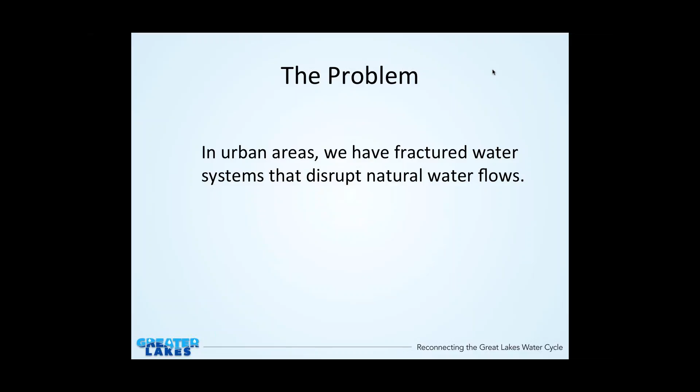The problem that we're addressing in this project is how we've fractured our water systems. We've disrupted the natural water flows. In the natural water system in general, when there's a rainfall or a snow melt, about 10% of that water flows off very quickly into the nearby streams, rivers, or lakes with natural ground cover. And about half goes into the ground, infiltrates to restore the groundwater supply, which is so important for our uses as well as for natural habitat, for wetlands, etc.

Unfortunately, as we've developed our municipalities, we've changed a lot of that natural surface into very impervious cover, about 30 to 50% in most urban areas. These are things like roads, roofs, parking lots, and even lawns that often are compacted. They're not totally impervious, but are less pervious than before. The result is that instead of 10% in the natural system, we get 30% runoff very quickly and immediately. And generally what we do in our municipalities is direct that into a pipe so that it's carried off quickly into nearby streams, rivers, or lakes.

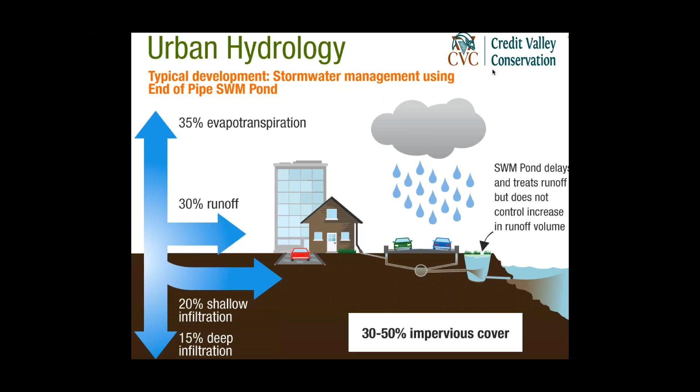So in this project, we're trying to find ways to reconnect the water cycle, and we are looking at water supply, wastewater, and stormwater as all part of one integrated cycle. You'll hear Becky talk later about the silos. We tend not to plan for the three of them jointly as part of the same system, even though they affect each other and the solutions work with each other.

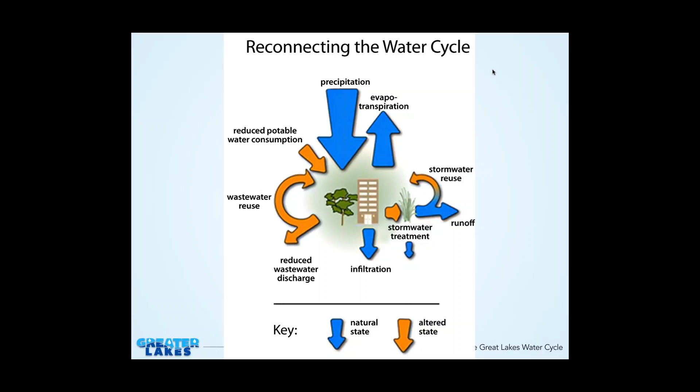Here's a chart which I won't go through in great detail, showing the potable water, that's our drinking water, wastewater, stormwater, and the parts that we're focusing on are in the mid-blue color, such as demand management, which is things like water efficiency, gray water, which is reuse of water, recycling, stormwater reuse, etc. So that's where we've really been focusing our work.

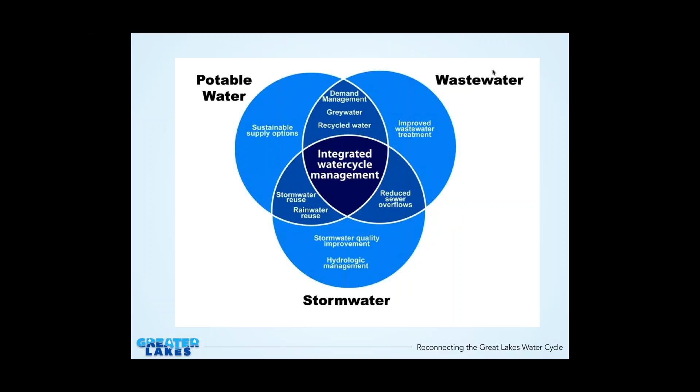I want to tell you a few of the main lessons we've learned that have become our guiding principles. The first is that we need to set up strong source water protection programs to protect the waters on a watershed basis for both natural and human purposes. We also need to engage in water efficiency and conservation programs to reduce the removal of water for human consumption from groundwater, lakes, or rivers. We need to set up wastewater reuse systems to further reduce water consumption.

So instead of just using water once and then throwing it away, we reuse that water by using it for outside watering, for example, or to deal with the flushing toilets as another example. We are using heavily treated water, drinking water quality water. We should only be using that for things that need that level of purity of water. And that means, for example, that we shouldn't be using potable water for most outdoor uses or for things like flushing toilets or washing clothes.

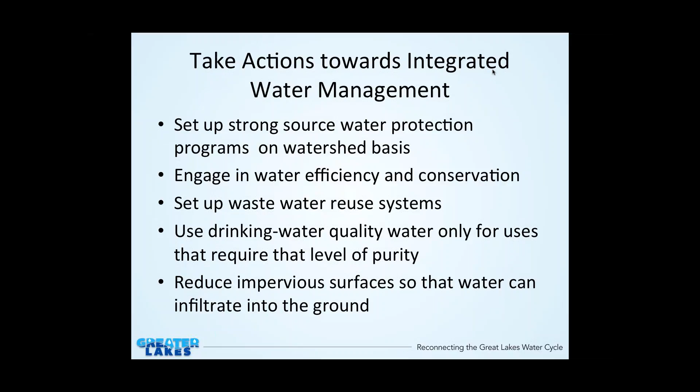And we need to redesign our urban areas to reduce the use of impervious surfaces to allow for more infiltration where the water falls. We need to also make sure that we treat green and gray infrastructure as part of one system. And you'll hear detail about this from Jim, so I won't go further into it. And we also need to look at stormwater and say, can we capture part of this stormwater to help reduce our need and be part of our water supply? So by having cisterns, rain barrels, etc., to use for both indoor and outdoor use.

Now the good news is that there's a lot of this going on, and I'm sure the municipalities and citizens groups who are on this call, many of them are working on really doing these sorts of things. But what we find missing and what we feel is the next step is to have a more systematic approach to it. And we have to have more state and provincial requirements for using these sorts of things as well as funding for using these sorts of things. But it has to become more of a systematic thing.

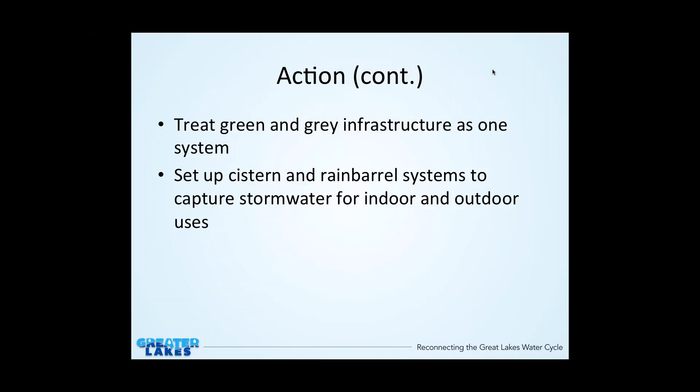To just give you a sense of some of what you get out of it, they put in a lot of detailed inputs. I'll just highlight a couple of them. The water demand forecast, avoided utility costs. So if you don't use as much water, what does that mean in terms of the cost of constructing your system? And energy data, which is very interesting in terms of if you're not having to pump as much water, what's the savings from that? And then they show outputs, which are how much less water you use, what are the costs and benefits of that, what impact does it have for a municipality in terms of the revenue that they raise by selling water, and what impact does it have on greenhouse gases and on energy reduction.

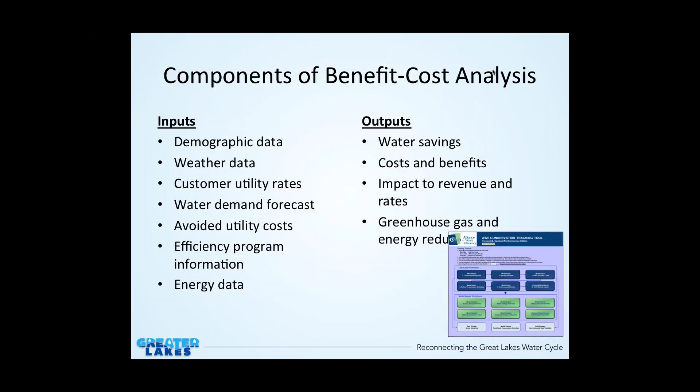And what's really important, and they show in their tool, is both short-term and long-term impacts. Short-term would be things like water purchasing costs if you're buying from a wholesaler, variable water treatment costs, the energy costs, of course, related to pumping, and the chemical costs. And the long-term cost is avoiding, deferring, or actually being able to stop expansion plans.

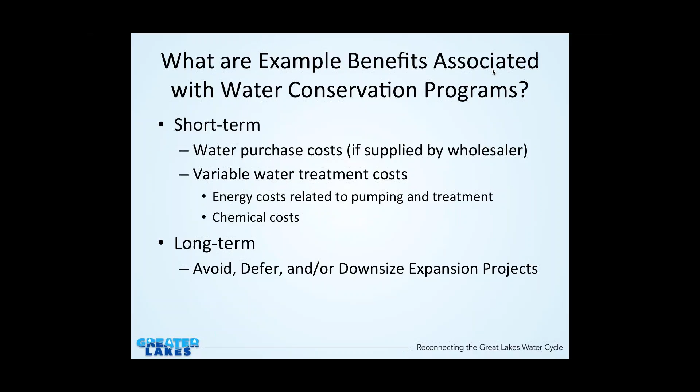I live in the region of Waterloo, and here they had figured they were going to have to build a pipeline out to Lake Erie, about 70 kilometers. And because of their water efficiency programs, they have now been able to take that out of their plans and said, we don't think we're ever going to need that. That is saving them $1 billion in terms of construction costs.

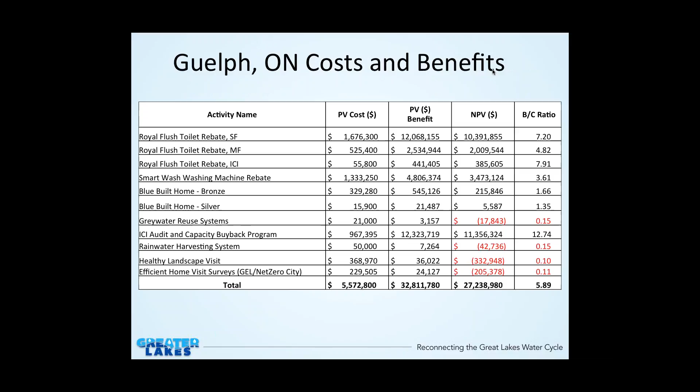These are sort of tables that come out, and I'm not going to go through these, but it's just to give you a sense of very detailed information according to each type of activity. Here's the one for Guelph. Each municipality is quite different in terms of what comes out. And you get charts such as this, and this is Oakland County showing when the water is used.

And you find, for example, the one at the back, which is Commerce Township, the heavy water usage is in the summer. And therefore that directs you to where you need to put your focus. Clearly it's outdoor summer use. That's the big issue in Commerce Township.

So I'll leave it at that point. I just wanted to make you aware of that tool. And as I said, get in touch with the Alliance for Water Efficiency for it. And we'll turn it over now to Jim to talk about the tool that has been developed specifically for our project and which will be available on our website.

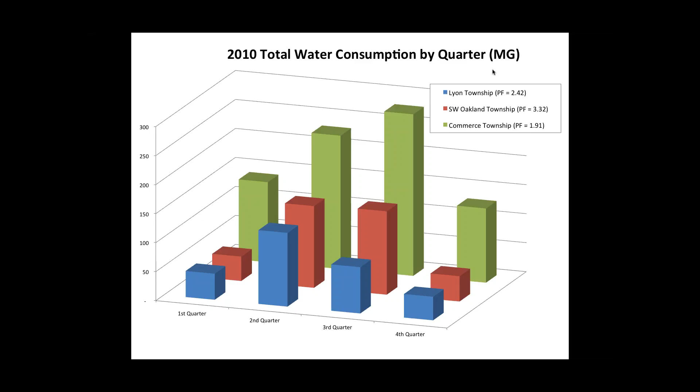Hello, I am Jim Ridgway, and I work for Environmental Consulting and Technology, and just as the Alliance for Water Efficiency was looking for the least cost ways of managing water, the drinking water half, we were tasked with identifying cost-efficient ways of managing stormwater and related subjects. And as such, we've generated a tool. This talk will talk a little bit about the tool and specifically about a little spreadsheet model that's different than some things in the market, but similar in other ways.

This is the identical thing that John showed before, and I think it's important when we start to just remind folks that our general public is generally very comfortable paying for water if they have a water supply. They are relatively comfortable with paying for wastewater and wastewater treatment. But how we pay for stormwater varies from county to county, city to city, state to state, and is something that we're working on.

So as the public works community is grappling with how better to manage stormwater, one of the first rules is get rid of some of the concepts that we developed in the 60s, which was take all the water you have and run it downstream and worry only about flooding. So as you start managing stormwater, some of those areas in the medium blue where it says reduce sewer overflows, these are benefits that may or may not be paid for by other entities than your drainage entity.

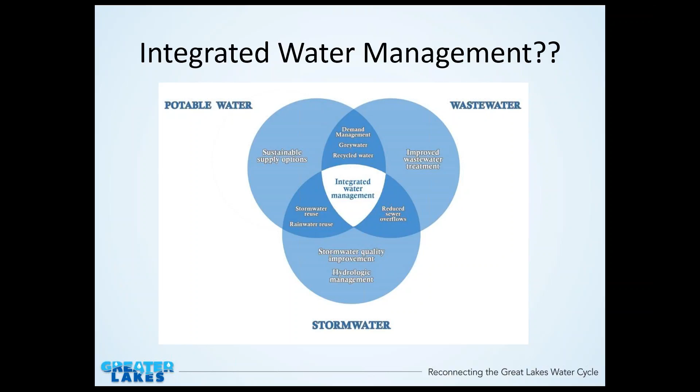And when we talk about silos a little later, that's really the challenge. You can get a benefit that will improve both stormwater management and wastewater, or both stormwater management and drinking water source, but how you pay for it remains a challenge with the current silos we have in place.

The question most people ask is, is green infrastructure cheaper? I would say yes in almost every case. But if you were to look at the case studies that were assembled by the American Society of Landscape Architects at the request of the EPA, they find some things a little bit different. Yes, the majority of them think it reduced costs or did not influence costs, but some would say some of the projects actually increased costs.

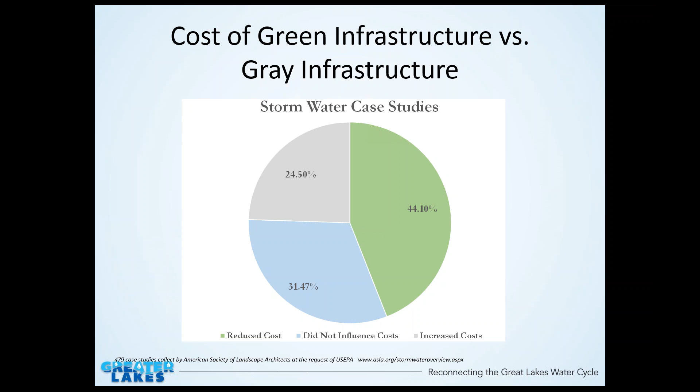As we move further in this discussion, you will see that some part of that is because maybe the green infrastructure chosen was not the one that should have been applied. And that will become a little bit more clear as I move forward. However, we evaluate gray infrastructure on whether there is no flooding, no standing water, particularly in stormwater. Yet we evaluate green infrastructure to a higher standard. We want to increase infiltration. We want to reduce nutrient loadings. We want

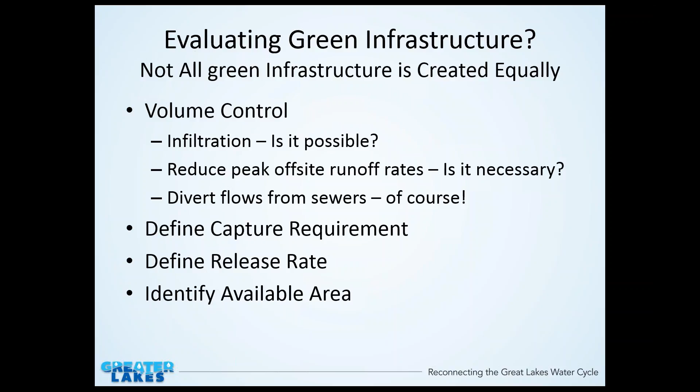lower cost. So when comparing green infrastructure to gray infrastructure, there are benefits of green infrastructure like greenhouse gases, energy savings, less sewage control, but those benefits are often not realized by the public works officials. So one of the things that we are trying to do is first remind the public works official, prioritize what you're trying to do with green infrastructure.

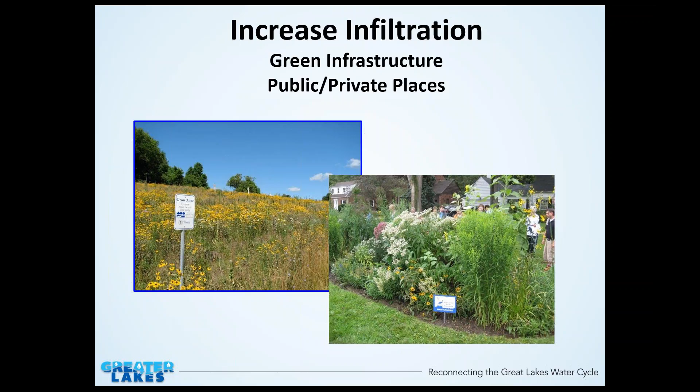So one of the first things that makes a lot of sense is try to increase infiltration, and that can be done both on public properties or on private properties. And how you get folks to do that, either incentivizing or requiring them to do things, depends on a number of things. But in almost all cases, increasing infiltration is good. And then storing water is also very good, and how you do that varies from place to place.

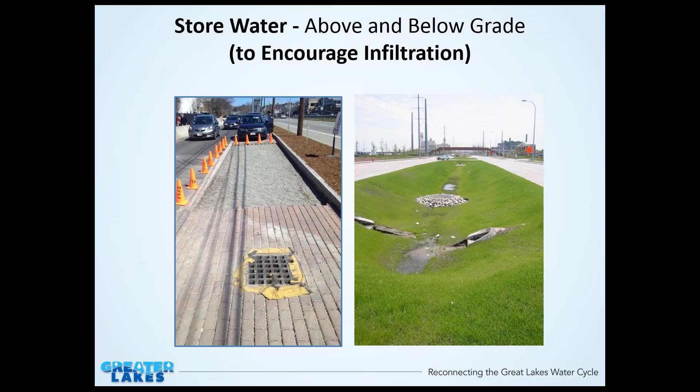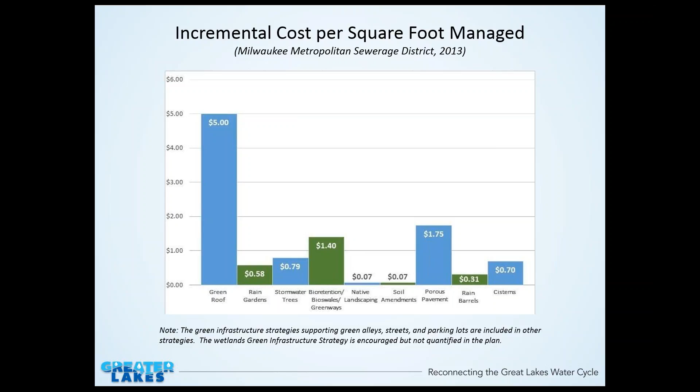In other areas, area is the driving force, and a lot of times that's just built into either rules or guidance, and this, once again, is that same study, and in this case they were looking at the cost based on area managed. A green roof would only manage the area of the roof, where a rain garden could manage a larger volume.

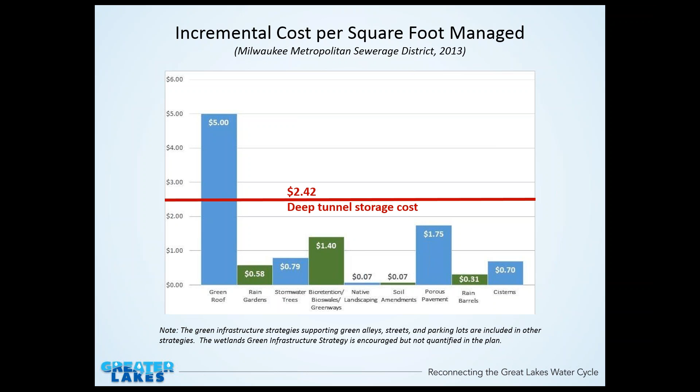And to give you some idea, comparing these costs on the area basis to what the cost would be if they did a deep tunnel storage for the same volume, you can see that if you tried to solve the entire problem with green roofs, it'd be more expensive. But if you try to solve the entire problem with a mixture of green infrastructure, it is less costly than the gray infrastructure solution.

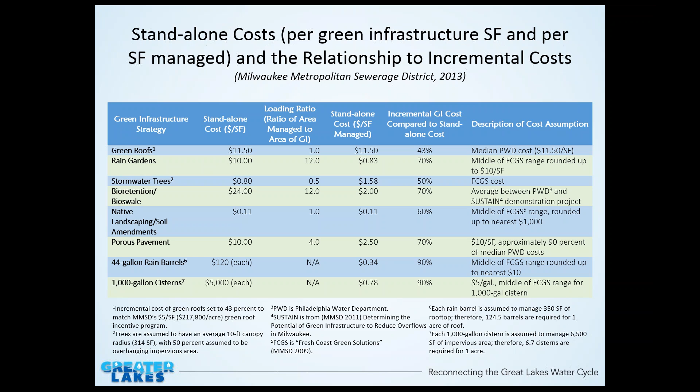I am really in the weeds, and I apologize for it, but it's my way of saying what we are charged with doing is finding how to take a large group of small projects and manage it in the least costly way so that it is, in fact, less costly than gray infrastructure.

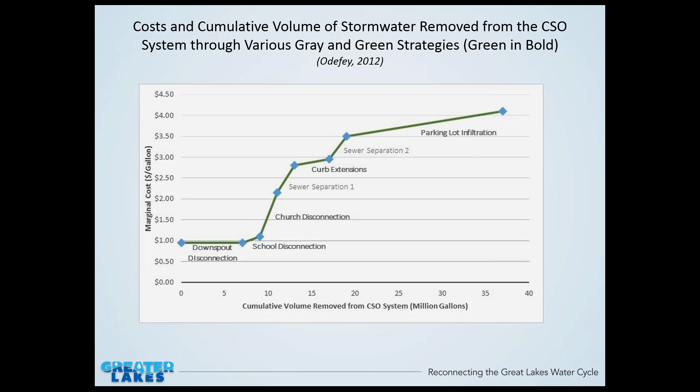So once again, what are the technical drivers? We start with volume management. But in some areas, and particularly if it's a combined sewer overflow challenge, sanitary sewer overflow challenge, flooding challenge, volume must be managed. And in fact, volume must be managed in all of these cases. You could be driven by a nutrient loading on a TMDL, but if you're causing additional flooding, no one is going to build it. So the first word in all of this is you must manage flooding.

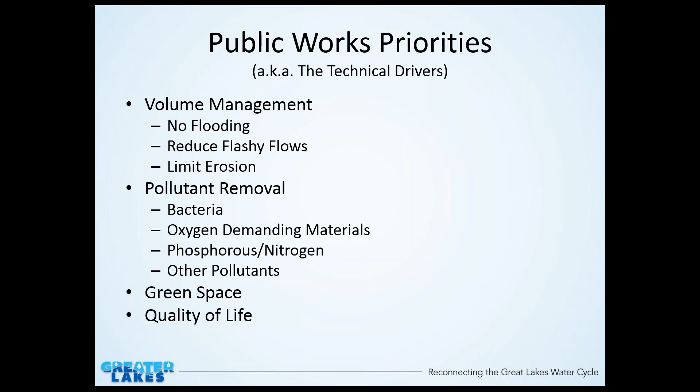But there are going to be some areas where, for example, the nutrient loadings downstream are an issue, and whether it is an incentive program or a regulatory program to reduce those, certain BMPs work better for removing pollutants than others, and we are well served to select BMPs to address those matters. And most public works folks also are interested in green space and quality of life, but sort of down the road, down the priority plan.

So we were asked to put together an impact tool, the Water Resources Impact Tool. It includes a number of things, some of which are managed by the spreadsheet tools we're going to talk about, and some of which are not. But specifically, we looked at all of the spreadsheet tools, or BMP evaluation tools, that were out there. And there are a lot of them, and a lot of them are excellent. As part of this report, we will have a summary of all of the ones that have been put together by WEF and WERF and ASCE, and there are a lot of tools.

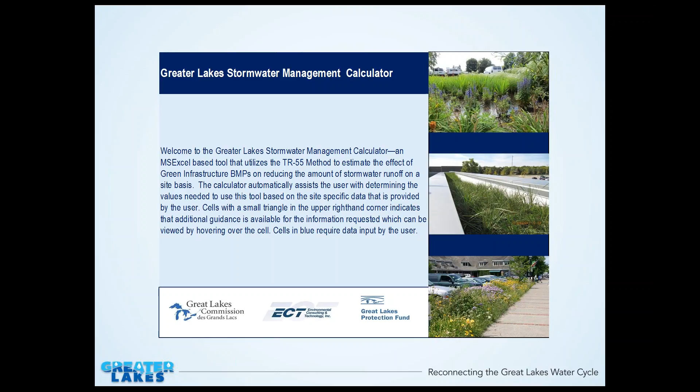And they answer a lot of the questions, and they're great for either big picture views of this or designs for site-specific stuff. But one of the things that we were not able to find is how a public works person or a city could get their arms around lowering the cost for a green infrastructure program. How do you compare how that mix is going to go together? So this is what one of the spreadsheet tools will look like. And later you will see these same numbers in a product that was done for the city of Guelph. But first let me just talk about the tool.

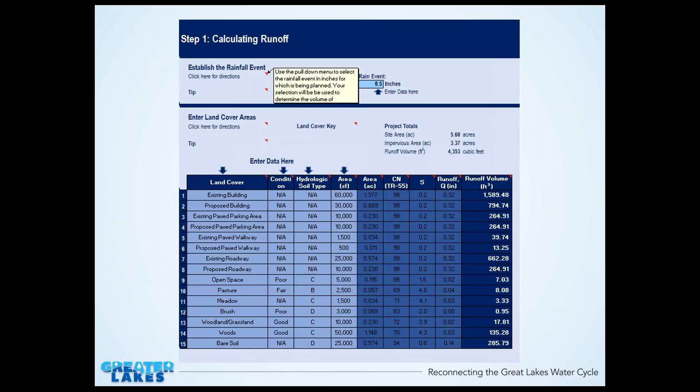If you're online on this tool and you hovered your cursor over that little red dot, it would tell you what each of these variables are. And so it can give you instructions, it can talk about what options there are for different inputs, and then it basically does all the number crunching. This is not a highly sophisticated volume model, but it's one that's used all the time, and it's good enough, in my mind, to get your arms around this problem.

So I'm about to click the next one, and it's going to change this half-inch rain to 2-inch rain. And if you look at the right column, you'll notice, what a surprise, you get a bigger rain, you have more volume. It's not directly linear, some change differently than others. But more importantly, you recognize there's a couple of things on this particular site that generate a great deal of volume, and we should probably pay attention to those.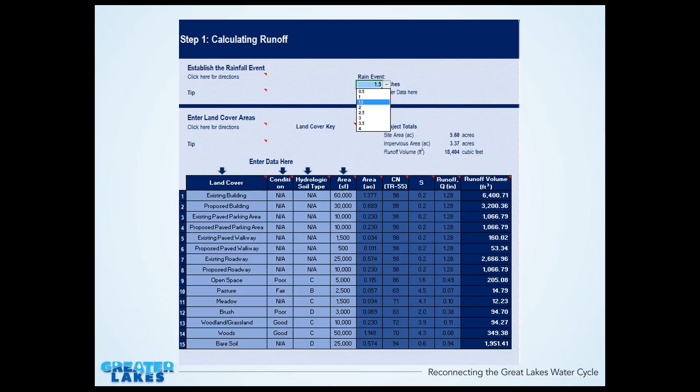So then, on each of the specific little areas, you can decide what BMPs work, how big they are, how much water they serve, because the very first thing you're trying to do is get your arms around the volume that is managed. Once again, this tool helps you walk through things, how to change variables and how the numbers change. So we took this tool and we applied it a couple places, including at Guelph.

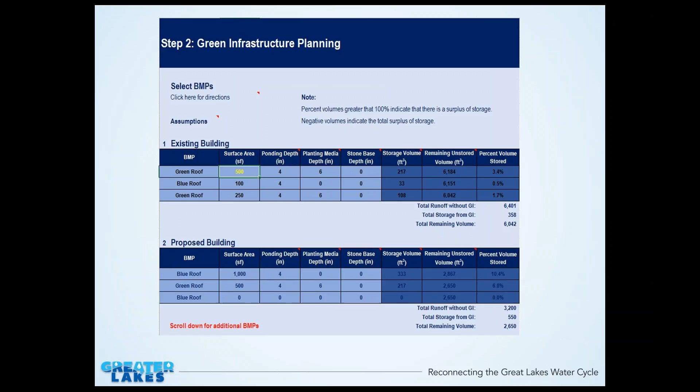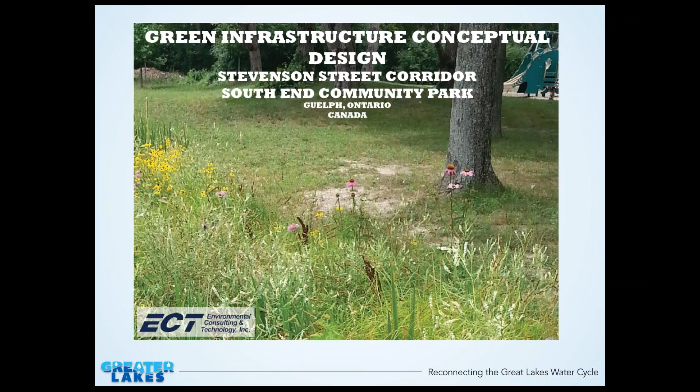And the Public Works folks at Guelph needed to communicate with their elected officials on how the green infrastructure program could be incorporated, and help them get around what it might look like and what it might cost. So they had done some planning on a park area. They had several options. There was one that was preferred by the public, and we were charged with getting our arms around the least cost way of controlling the stormwater off this entire site.

I like talking about parks because often public works types look at public land, much of which is parks, and say, oh, well, we can go store water there. I happen to be from a community that recently had a parks millage, and the soccer moms wanted more soccer fields, and the baseball dads wanted more baseball fields, and there's very little property around, and the last thing any of them wanted was a wetland that was going to prevent either one of those.

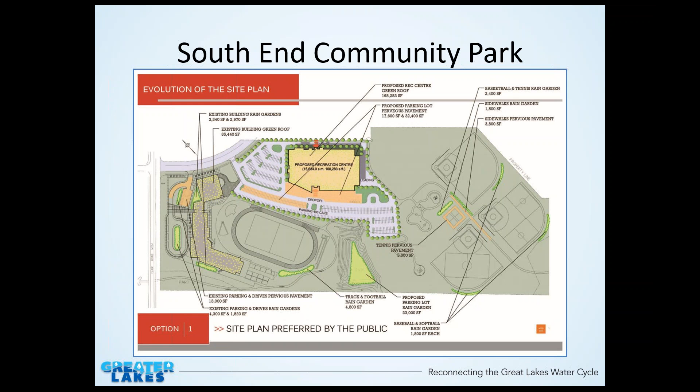So even though parks are open, and even though parks are public, managing the green infrastructure on that park has to be done such that the use of the park remains, and it's something that folks want to live and play around.

These are basically, we looked at the types of green infrastructures that could be used on this park, and we calculated how much volume you could capture in a 100 square feet of area, because you're trying to shoehorn this work into an existing park.

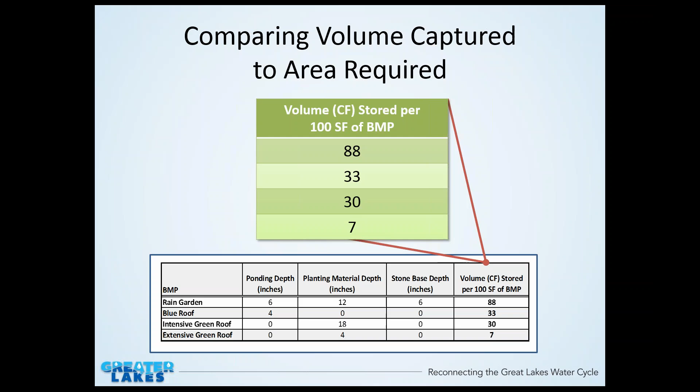The spreadsheet, on the left are the little parcels of land within the park. Some assumptions go across, and there was a proposed rec center that was going to go in, and if they put it in, they could expect to add another 11,000 cubic feet of water that had to be managed if they wanted to capture the 1-inch storm, which was the design criterion selected for this exercise.

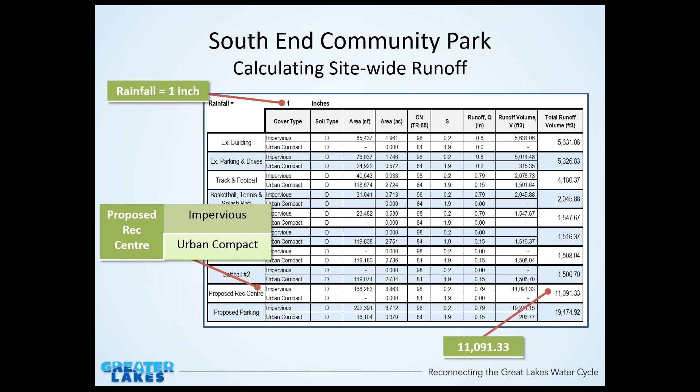In other areas, like the existing drive, we had already calculated the volume that needed to be captured from the existing drive, and there are a couple ways you could have captured, managed it. You could have bioinfiltrated it next to it. You could use porous concrete, pervious pavers, or some underground storage, and the size of those would vary to capture the amount that was a design storm, and therefore the cost of those would vary.

And so by the time you get over to the construction cost, you look at these and you think, oh, underground storage was the least cost. I'm not suggesting that that's always the least cost or the only solution. I'm just saying that the public works person could take a look at this and think, I know what that looks like, I know what it costs, and by adding all the costs for these different things, you could come up with what the total cost for the park would be to capture the design storm.

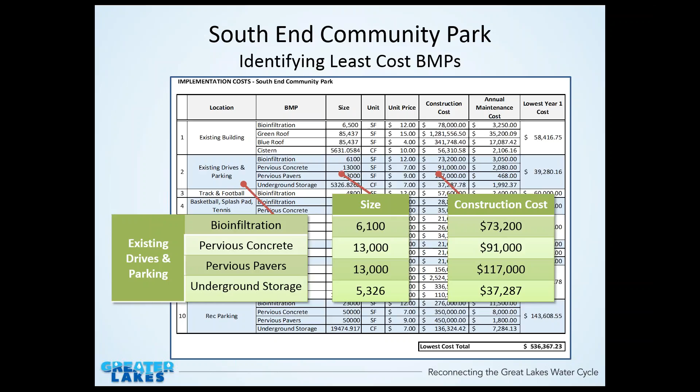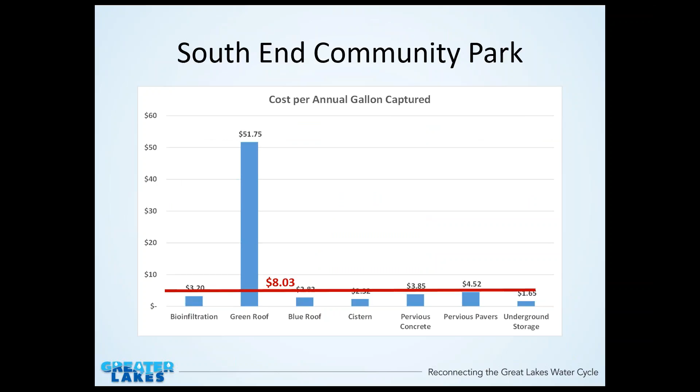And not surprisingly, some were quite expensive and some were less expensive. But by mixing it all up, the overall cost was, some would argue, reasonable. And that's the sort of thing that a city council wants to know if they are choosing to proceed.

And once again, this is what was shown. There's areas that we would have proposed green roofs and some pervious pavement and certain little swales that were shoehorned in around the active recreation sites. I think a workable plan, and a plan that could be easily viewed by a public, presented by a public works official to their commissions, and they would understand what you're trying to get done.

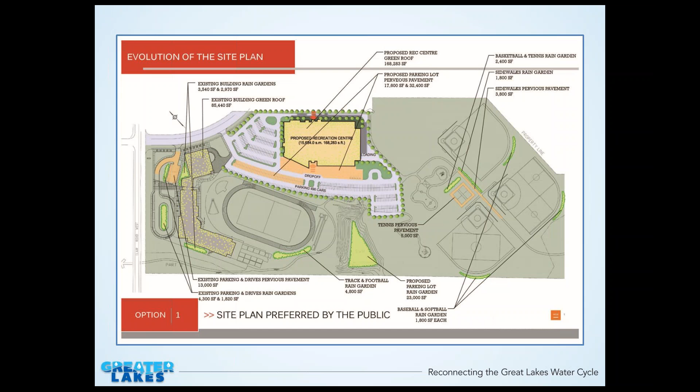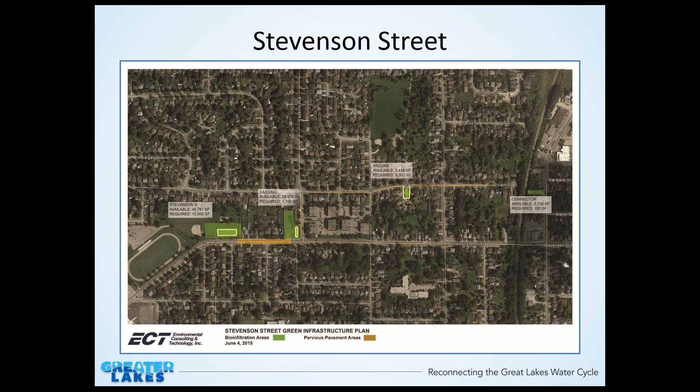We also were asked to look at a road, and roads are a challenge. They make an awful lot of stormwater, and they are a giant gray infrastructure stormwater management system. And so to green them is a challenge. And so we were asked to look at Stevenson Street. And this is a similar sort of thing. On a given road, we could look at bioinfiltration or pervious concrete, pavers, or underground storage. We knew what the design storm would be, what the size of that would be, and what the relative construction cost would be.

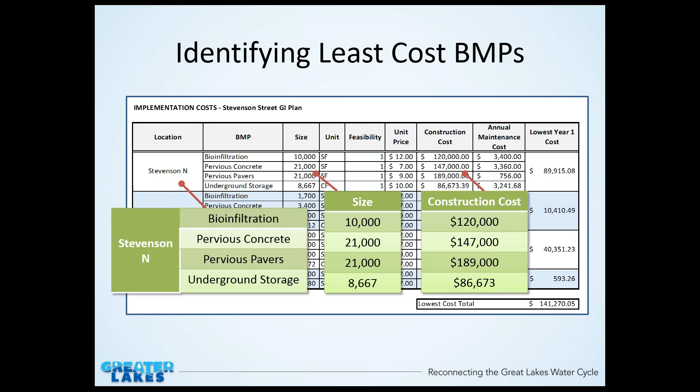And using those similar assumptions, if you look starting at the left, you can see a portion of the road could have been stored on this park, and the highlighted yellow area is the physical area that would be needed to be shoehorned into that park to capture the stormwater that's basically to the left of this. I'm not saying that the parks people would agree with it, but it allows you to see just about how much area would be required.

The area in between with the yellow hashing was an area where pervious pavement was suggested because there wasn't sufficient property to handle the volume of water that you're trying to capture. And the rights of way were quite narrow here. The road then goes up on Cassino, and there's a little area, and you can see the little dot in this relatively large plot of land. That was relatively easy to manage.

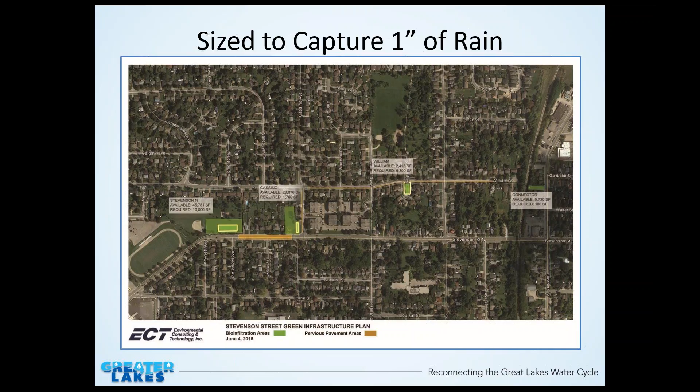And then on the right-hand side, you can see the little park where the yellow box is bigger than the park. And what that tells you is, even if you took the entire small park and used it as a bioinfiltration area, you don't have enough space. In both the areas on the right, where the wide area on the left is pervious pavement across the entire street, the one on the right just has a parking lane of pervious pavement because that was enough to manage the volume we wanted.

Retrofitting things, there are ways that you can incentivize owners to retrofit. In the earlier presentations that were done by the Alliance for Water Efficiency, they showed that in some areas, if you replaced shower heads, it was cheaper for the utility than if you didn't. There are plenty of places that retrofitting property is cheaper than doing gray infrastructure.

Bringing it to scale is a whole other challenge. We can talk a long time about it, but how you pay for it and how you build a bunch of little things and manage a bunch of little things is a challenge, but doable, and it's being addressed in many areas today. The incentive, how you build your stormwater fees and the incentives you bake into those are probably, in my mind, the biggest driver for getting green infrastructure put in place rapidly, particularly on private property.

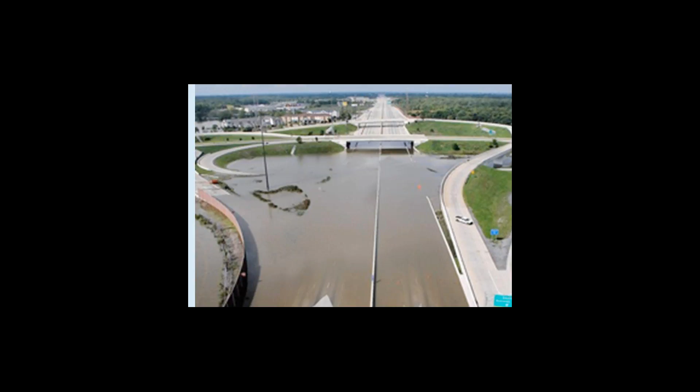Hey, Becky, this is Laura. I'm going to pause you for just 1 second. Your slides aren't quite fitting into the screen, so maybe if you just go back to exit out of presentation mode for a second and just restart it, you'll be at the right size there. Did that work? Yep, now we can see the slide. Let's see, it's still zoomed in a little more than we need it to be. I'll go to the next one. Is that better? The slide itself gets cut off once it goes into presentation mode. So let's see here. Yep, it's still getting cut off. So I just expand it and deal with it. That's just fine. Work? Yeah.

Yep. Okay, so here's a definition of integrated water management that we used for our workshop in Guelph. And it puts some words behind the graphics that you saw in John's and Jim's presentation. This working definition came from Ontario, and in general, IWM is about managing human activities and natural resources in a defined watershed boundary.

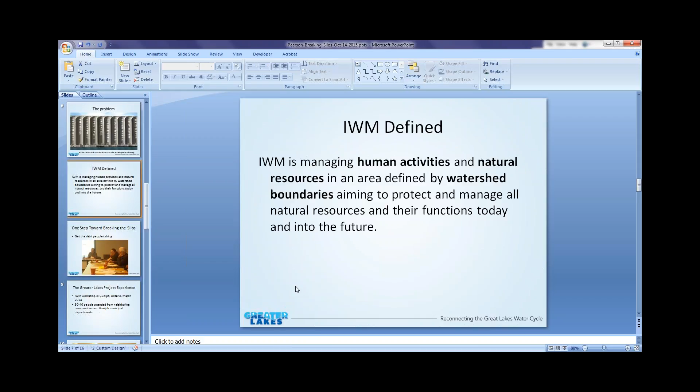So one step towards breaking down those silos is to get the right people talking. In Guelph, we asked folks from multiple departments within the city: transportation, finance, parks and rec, water. I'm sure I'm missing a few, but they were all there, and they were able to reflect on what IWM is for them and begin to have that discussion.

So again, we had this experience for a workshop in early 2000. It was in 2014. This was a little bit of a typo. We had 30 or 40 people attend, and some of them came from the surrounding communities in Guelph. And that was particularly helpful because they shared their experiences with working in the municipalities.

Here's another slide from the workshop showing that we invited experts to showcase certain elements of IWM on the ground working in Ontario in this case. And this is one of our project advisors, Christine Zimmer, from the Credit Valley Conservation Authority, discussing a case study of IWM at the workshop, which helped prompt discussions among the municipal department representatives at that workshop.